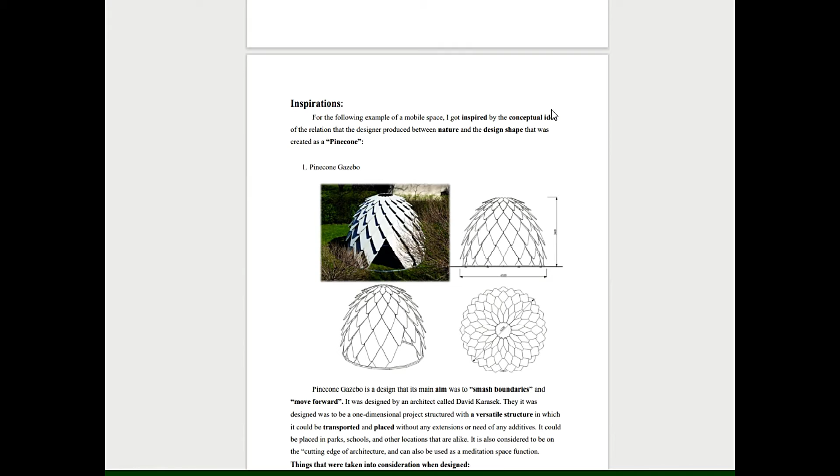Some of the inspirations when starting off my research were examples like this one, the conceptual nature that was taken from nature to a design.

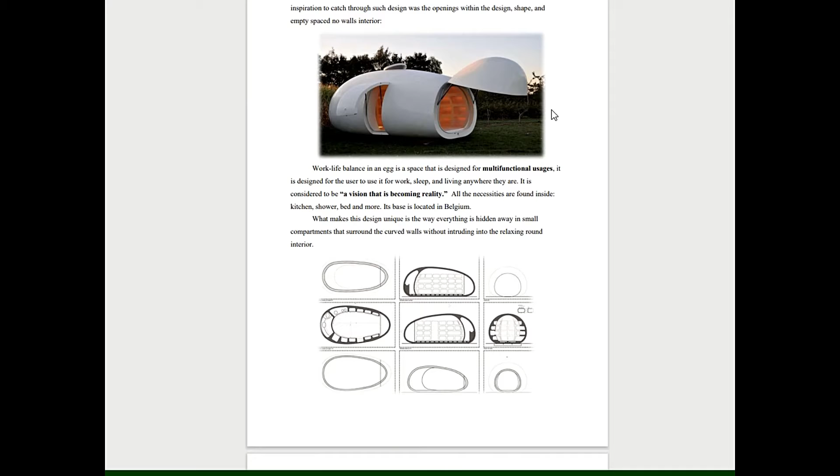Here we can see another inspiration of the shape and the openings. The most inspiring thing about this was the interior of it, how empty it was inside, and how everything inside was used as a shelf form, but also you can use it for sleeping, storage, etc.

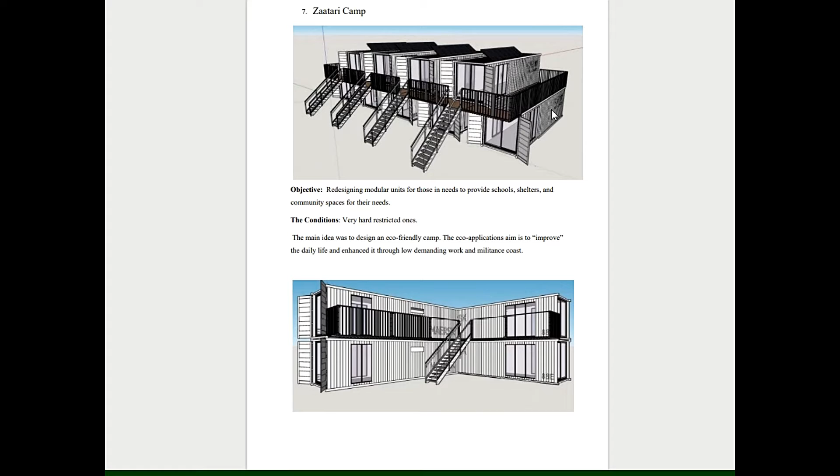This is just an example that was inspiring in terms of the design, shape, or opening. This is a student example and proposal, and here we can see the lighting and the openings, etc.

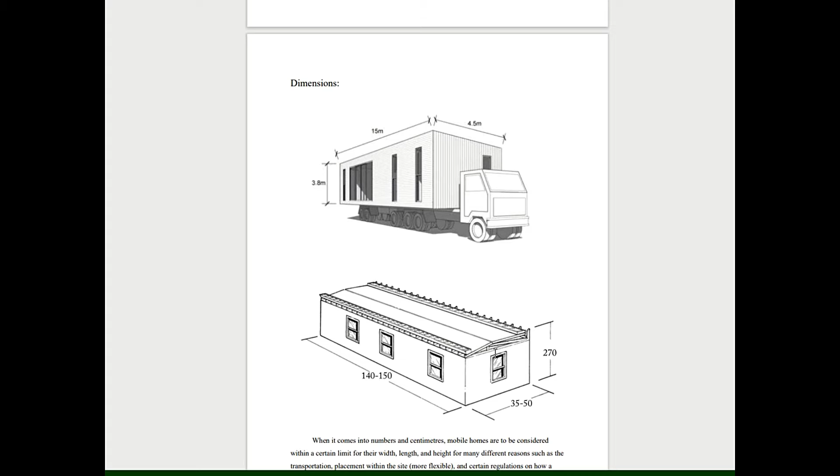Something to take into consideration when it comes to mobile spaces is the dimensions, which are very important in terms of height, width, and length, because of transportation when they're placed on trucks or anything else, so they can be moved in the streets.

In conclusion, refugees and exiled people, economic crisis, and locations consisting of high prices for people who cannot afford them can be solved by mobile spaces, in order to provide more living space and more shelter for those people.

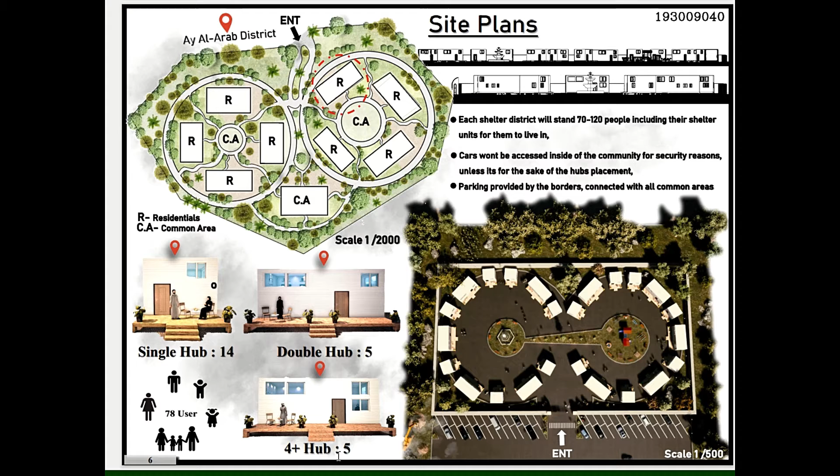In each residential community there will be a single hub, a double hub, and a 4+ hub. There will be 14 single hubs, 5 double hubs, and 5 4+ hubs, consisting of 78 users total.

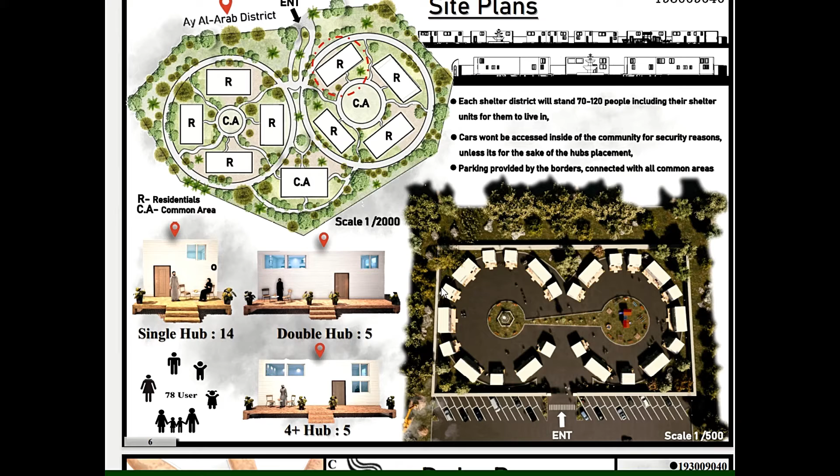My conceptual idea was inspired by a unity symbol and the bonding of holding hands with each other, which led me to design the orientation of circles and their placement to show the symbol of unity, proposing it within the topography and reflecting it on the ground for the people, to have a more reflective idea.

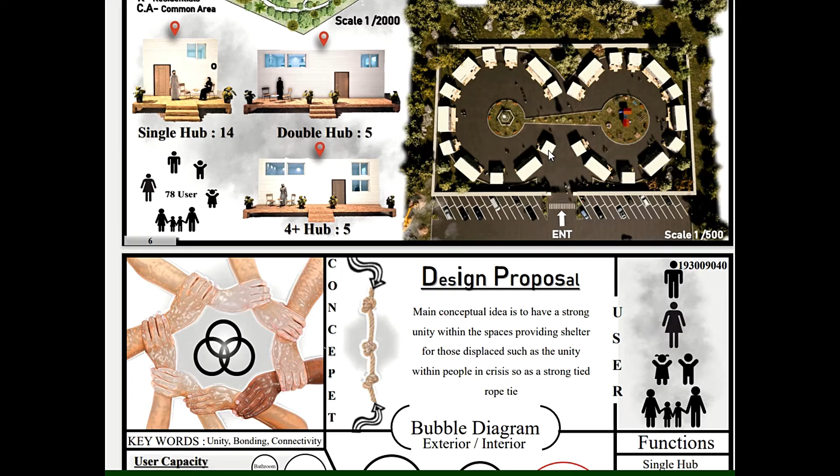The border is also closed for more safety, with no car entrances, and parking outside; entrances are only by bicycle and walking. There will also be other common areas inside the residential communities for kids to play around the hubs, with water elements for people to enjoy.

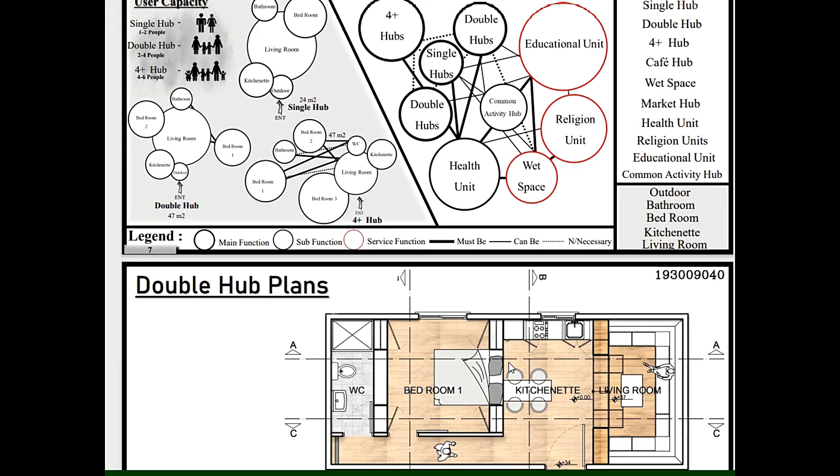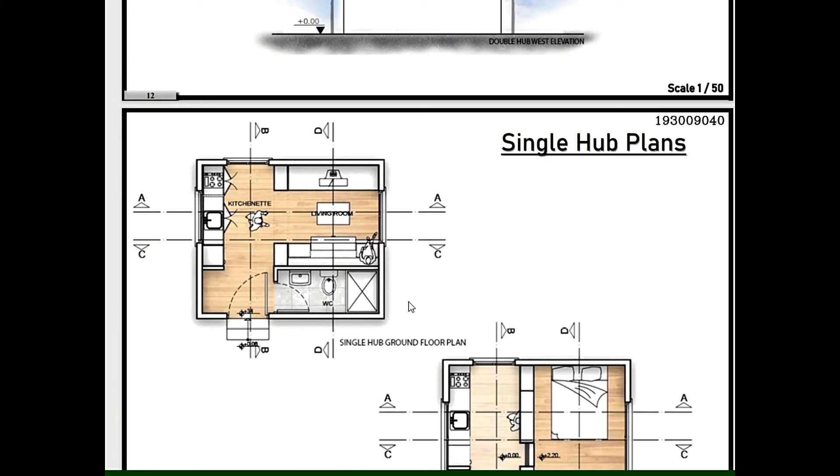These are the sections for my hubs. We can see the bedrooms, the toilet, and a raised floor for storage. Here's another perspective showing lighting elements and elevations. The single hub will fit 1 to 2 people, and this would also allow us to have more space within the topography.

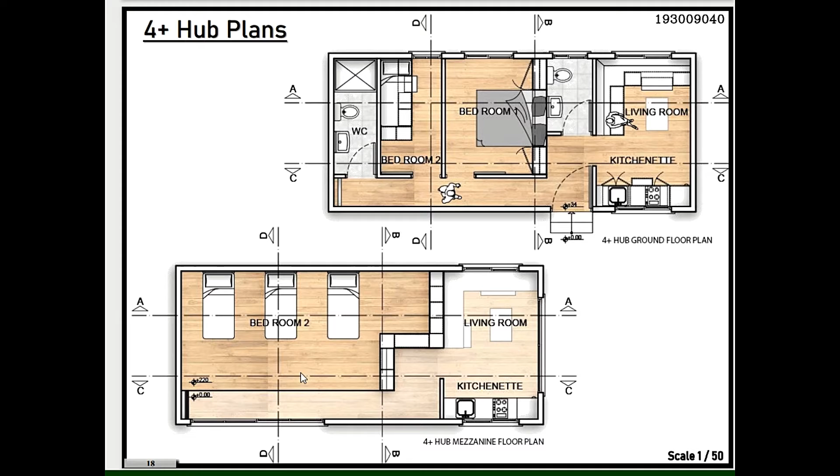Elevations for the 4+ hub, which will fit 4 to 6, maybe 7 people. This one includes another toilet because the number of people increased, two rooms on the ground floor, and a more extended mezzanine floor. These are the sections.

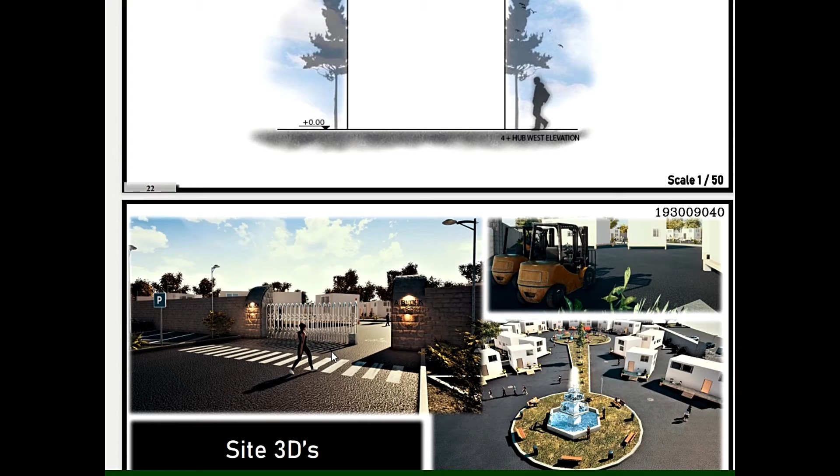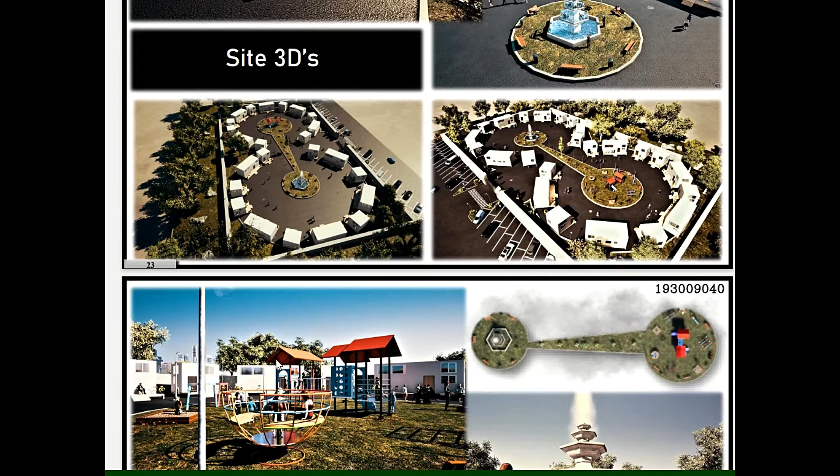Elevations, and this is the site 3D, showing the closed community inside. These are for carrying the mobile spaces and the placement of the common area. This is my common area 3D inside the residential communities, followed by double hub 3Ds and single hub 3Ds.

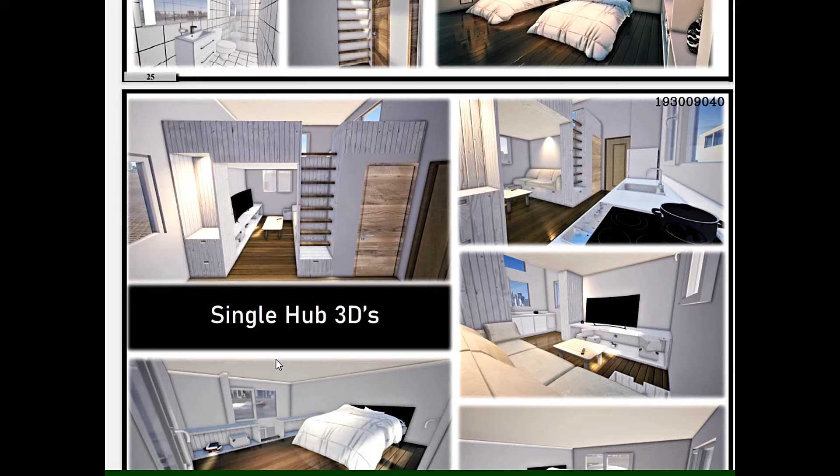4+ hub 3Ds, and last but not least, my sustainable proposal: direct ventilation through the windows for a healthier environment inside, recyclable material from shipment containers made into living spaces, catching water above on the ceiling by making a bit of depth, and solar systems attached temporarily rather than permanently to make it more modular, in case of moving the space elsewhere, no longer needing that space, or converting it from a double hub to a single hub.